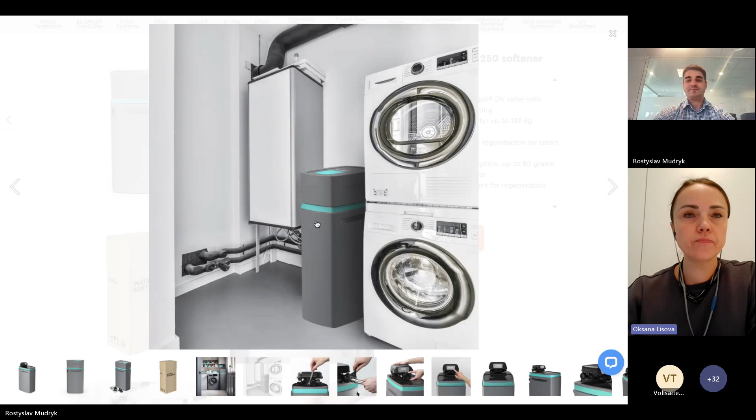You also mentioned that we at Ecosoft created Anthracite when we finalized the Titanium. But what was the reason for having the Titanium, and also adding the new softener to the range?

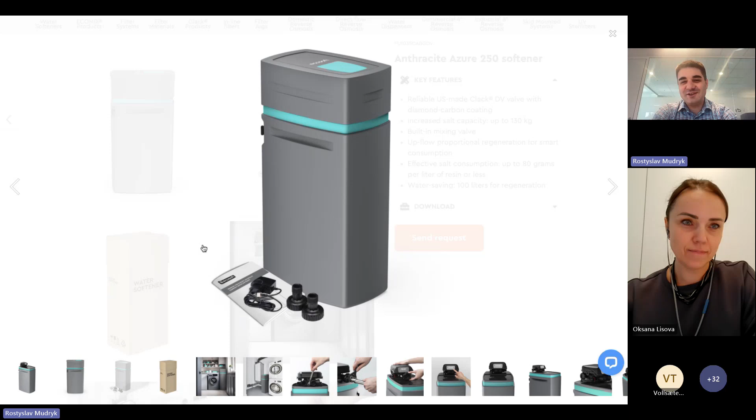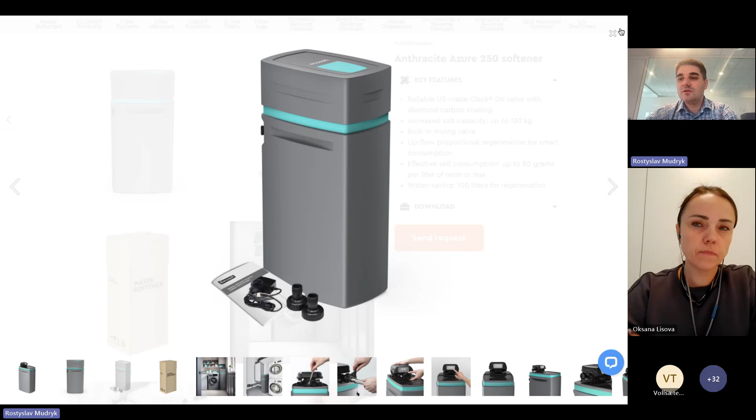Well, now I have to jump a little bit to the Titanium line, and explain what the Titanium is for. The Titanium is a unit made of components that are all NSF certified and assembled by Ecosoft here in Belgium. There are many dealers and water professionals who like this kind of equipment. I will jump to the Titanium line and just explain.

If we look at the Titanium line, the cabinet body itself is produced by Clack in the US. Then we use the CE valve, also produced by Clack, but designed by Ecosoft from the programming point of view and then produced by Clack. We also use Clack pressure vessels. I think we are one of the few companies who still deliver units with Clack pressure vessels. Not every company even knows that Clack produces pressure vessels. There are many dealers who like this approach, and this is why we have Titanium Gold. But there are many others who want a more basic product, and this is the reason why we have both the Titanium line and the Anthracite line.

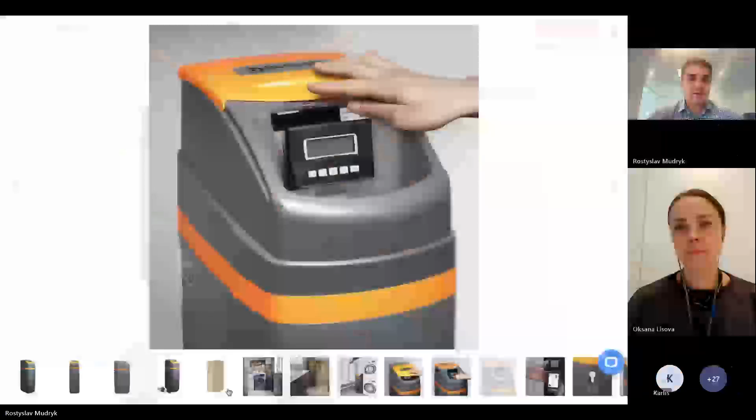So this is a part of the portfolio, and this is how anthracite was started. So we have two units here. The unit that I have just explained is this one, the anthracite gold, with 37 liters of the Ecomix, and then it delivers 1.8 cubic meter per hour flow.

Then on the other hand, we have many customers who have tap water supply, and then they don't have any iron. So for them, we designed the Anthracite Azure line, that is a softener. Basically in total we have 4 models: 2 for Ecomix units, 2 for softening, one model for a house with two bathrooms, and one for a house with one bathroom and a kitchen. So this is basically the portfolio.

Okay, but what was the reason, for example, to choose these two particular sizes, 25 liters and 37 liters? Why not more?

These flow rates are, I would say, 90% of all the requests we have from the market for the household applications. But by the way, not only the household applications. This is why to cover these applications we can use 2 models. And by the way, 2 models is also very nice for our customers, because if you have only 2 models, not 4, not 5, then it's easier from the warehouse point of view and from the logistic point of view, also from the marketing point of view. You have 2 models on your web page or in your catalog on the stock, and then if you could cover 90% of the cases, it's as simple as that.

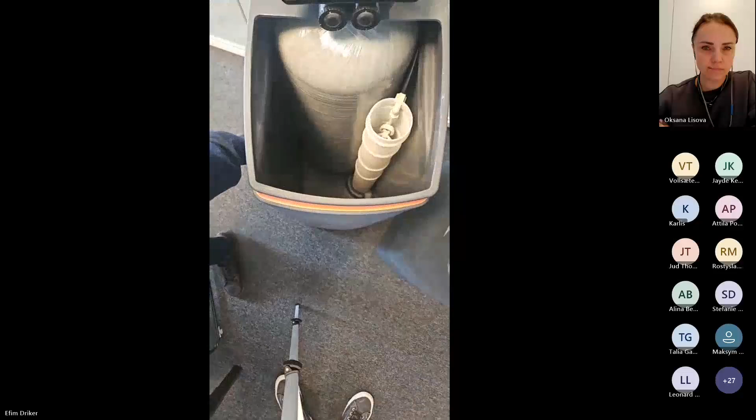Guys, we do not hear you. You don't hear us? Now we can hear you.

Yeah, now it's good. So also what we have is the valve. The valve is of course mounted, it's quite heavy, so the Ecomix is inside. And then, as I mentioned, we have the transformer. It's here, it's already connected.

Then what is also important to mention is that here on the back we have a special sticker that has a lot of necessary information. First of all, you see the model of the softener, so you see that this is the Anthracite Gold 370. Then you have the part number. Also you have a QR code that gives you immediate access to the Quick Connect guide that I will show later.

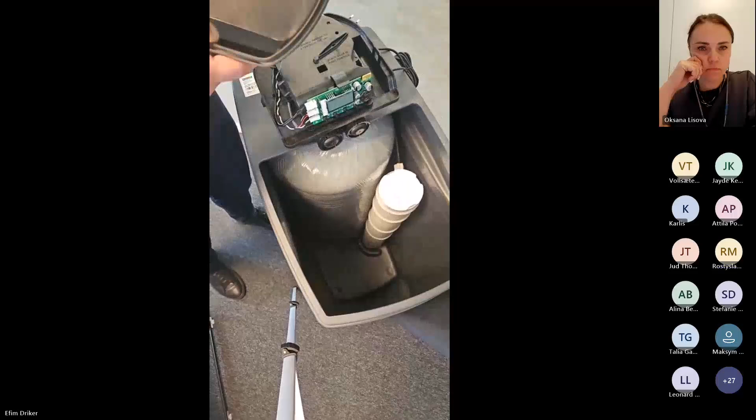Also, maybe not all of you know that if you remove the back plate of the valve, you will see another sticker with a serial code and the date of manufacturing. So this is also sometimes important to know, when the unit was built.

This is it. Then on the back of the product there is an overflow set. It's somehow integrated in the cabinet body, so it is inside the body, and at the same time it is easy to connect the overflow pipe. The overflow elbow does not go outside the unit, so it is actually safe from the transportation point of view, and then you could put the unit as close to the wall as possible. So this is what we have in the unit.

Then we have the connection kit. It is a straight 3/4 inch connection kit, and then we have the manual. The manual has a sticker also with the manufacturing date. And actually, we prefer to have as few pages as possible and to use less paper, so you see it's quite thin. So this is what is in the box. Let's put it back.

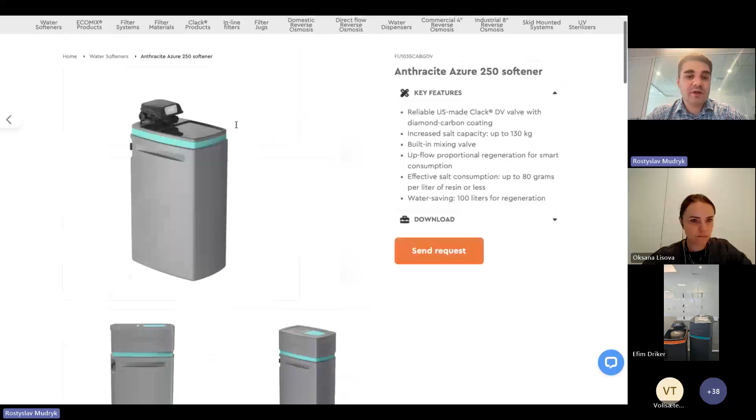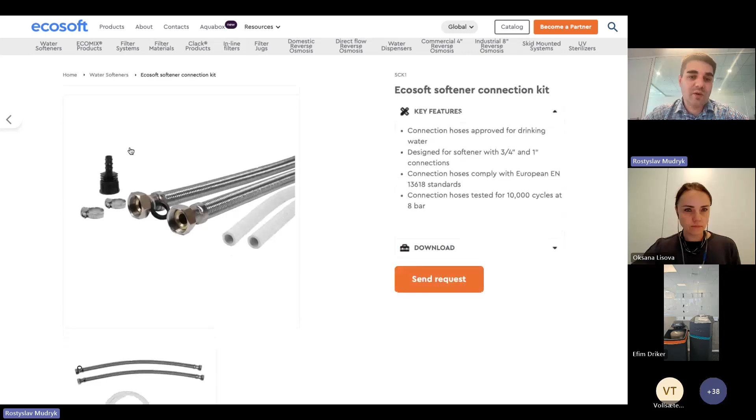So now you see again the web page. Actually, when you are on the product card, you could browse down and see what you could add. First we could add the connection kit - you will require the 3/4 one. Now, the connection kit is a set of pipes and fittings that allows you to connect the softener quite fast to the pipelines.

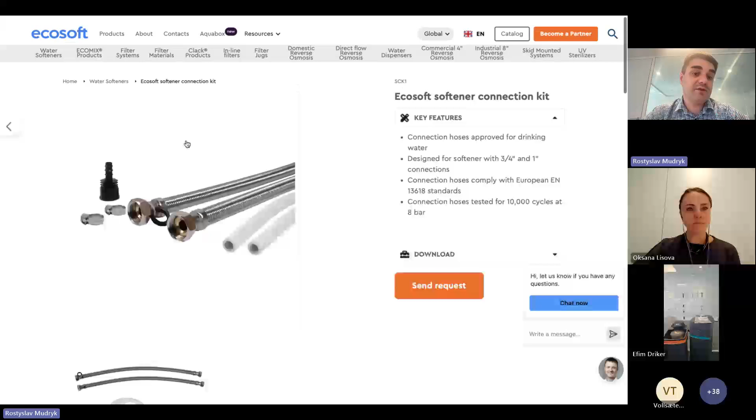So we have the two flexible hoses for inlet and outlet, and also two flexible hoses to connect the drain and overflow. And of course we have a fitting that makes it much easier to connect the drain pipe to the valve, and also the clamps, just to fix the pipe. So this is first what we recommend to have.

Then for sanitization purposes, you could use the softener hygiene guard. This is the chlorination cell that can be easily connected to the disc valve as well as the WS valve, and then you could adjust it for the certain softener.

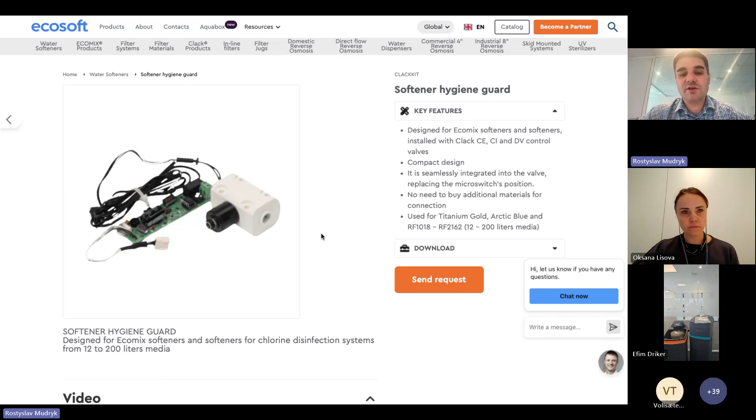This will be needed to do the hygiene cleaning of the media. So every regeneration during brining, there would be some concentration of chlorine, around 2 to 4 ppm. So every time the unit is regenerated, it will be disinfected with the chlorine.

The siphon connection is two in one. First, it makes it easy to connect the softener to the sewage system. Second, it has an air gap to protect the softener from the drain line and the sewage line. This is a very good and useful accessory for all softeners.

It also has two connections, reminding every installer that there should be two pipes connected to the siphon: the drain line, but also the overflow line. Normally the overflow line is not connected and just left as it is, but here it reminds you to please connect the overflow line as well.

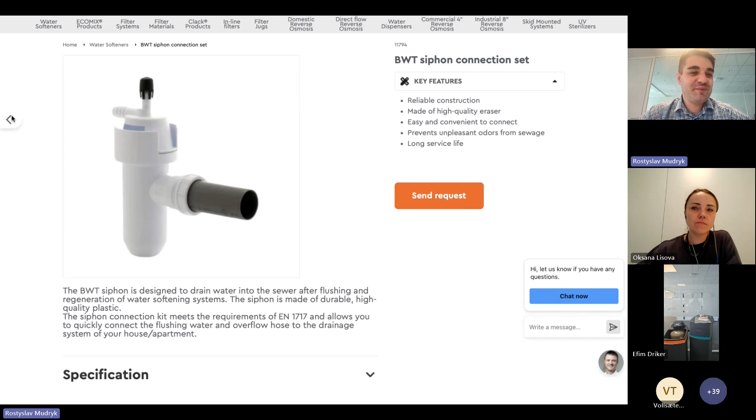And of course, the connection multi-block. These are very useful units for installation, coming from BWT. The connection module has an inlet and outlet, and you connect the softener with flexible hoses. With the large knob, you can shut off the softener and open the bypass, and with the small one you can also use it as a sampling point, which is also very important for maintenance.

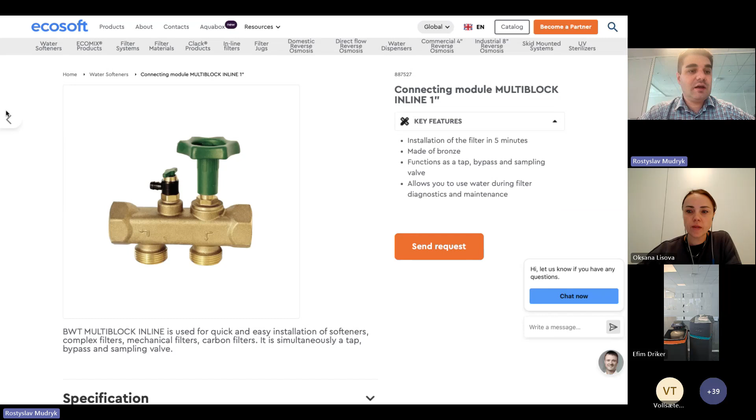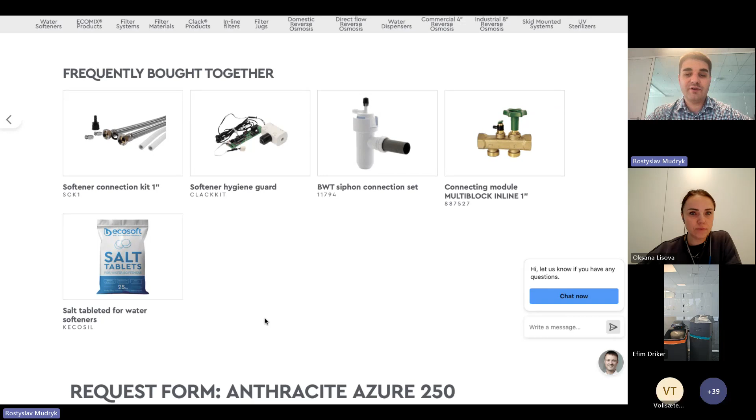And finally, the salt. You could also buy and deliver salt together with the softener. So as you see, a variety of things.

Let's return to the cabinet and talk a bit more about the media we use inside. What type of media do we use in the anthracite line? In the anthracite line we use Ecomix A media, designed to remove hardness, iron, manganese, ammonia, and a moderate amount of organic matter. In the anthracite azure line, we use a good quality cation exchange resin for softening.

So why not Ecomix C? Why A? Normally Ecomix A covers all the basic requests that we have and our customers have, and since the anthracite line is also a basic line, we think this combination works much better — basic request, honest price, because it has a relevant specification. The titanium gold line uses Ecomix C, which normally covers more specific requests, because Ecomix C is more universal media. It has better performance on all contaminants, including better removal efficiency of organic matter, to meet higher requests.